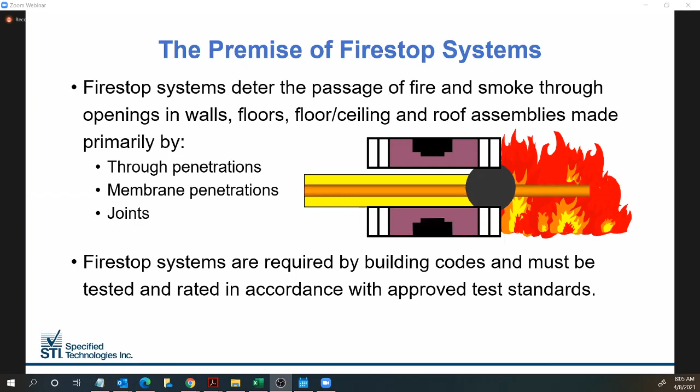Firestop systems deter the passage of fire, smoke, and hot gases through openings in walls, floors, and roofs for through penetrations, membrane penetrations, joints, blank openings, gaps, and other voids. These systems are required by building codes to be tested and rated as part of an assembly in accordance with their approved test standard.

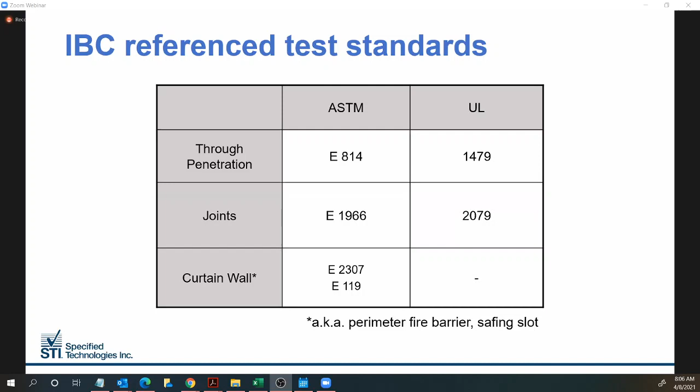The main test for penetrations is ASTM E814, with the expanded UL 1479 version giving the additional options of W and L ratings, those being water and air leakage ratings. For fire-resistive joints, ASTM E1966 provides fire and temperature resistance, whereas UL 2079 does the same and again provides the option for air leakage and water resistance. For curtain wall or perimeter fire containment, ASTM E2307 is the main test standard, but E119 is also allowed under a certain code exception. For that one, there is no UL version. If you're in Canada, then ULC S115 applies. And if you're joining us from outside of North America, you may be using British standards like BS 476 Part 20, European norms EN 1366 with various parts, or whatever your country or local jurisdiction has adopted. The basic principles of firestopping are the same around the world.

These are examples of common firestop applications, including pipe penetration, curtain wall joint — that's the gray colored sealant there — and head of wall joint. Firestop systems use a variety of specially formulated, independently tested fire-resistive products for sealing penetrations and joints in fire-rated construction against the spread of fire and smoke. The emphasis here is on systems, so firestop products are one component of a system. But firestopping certainly is an important part of fire containment and life safety.

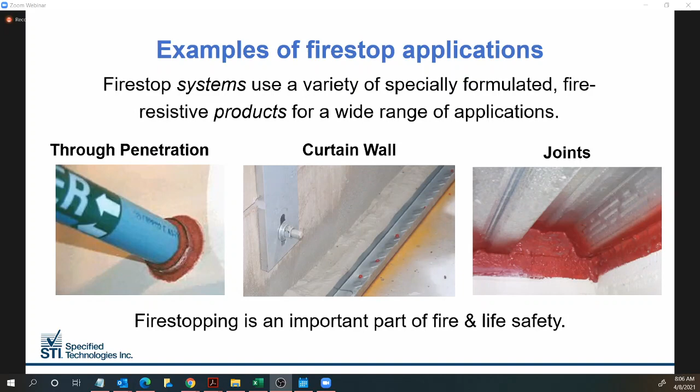So who tests fire stop systems? Fire stop system designs are tested and listed by independent testing agencies. In North America, UL, ULC, and Intertek are the most common, but FM Global also has listings, and Southwest Research Institute tests fire stop systems as well.

Most have their own listings published online. I'm sure you've seen some of those if you're into the fire stop business at all. And if you're in the UK or other countries using British standards, Warrington Fire is very well known,

and there are many other relevant testing agencies depending on your location. So what is a tested or listed system? It refers to a penetration or joint assembly which is rated per its corresponding test standard.

Shown here is the top portion of a simple pipe penetration system, and the written description is summarized on the left-hand side. All elements of the fire stop system, including the assembly into which it's installed, comprise a specific and inseparable unit that must be utilized as such. The specific elements of each design become integral to the listing.

In this example, UL system C-AJ-1240 describes all the elements of a metal pipe penetrating the concrete floor or wall. So in this one, it's a minimum 2.5 inches of concrete floor or wall or a CMU wall.

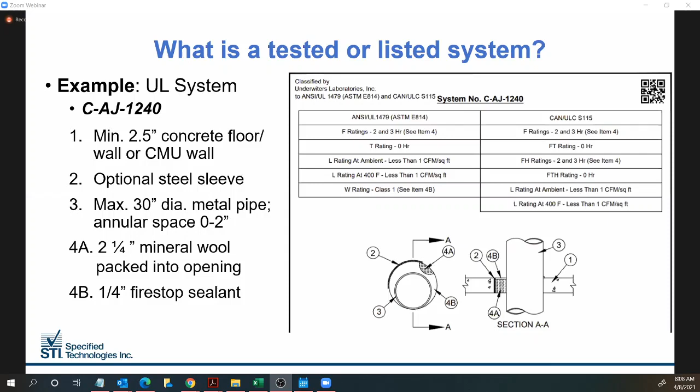So building codes require fire stop systems to be installed as tested or listed by qualified test labs. These two sections of the International Building Code are examples.

Through penetrations shall be protected by an approved penetration fire stop system installed as tested in accordance with ASTM E814 or UL 1479. And under joints, it states: installed in accordance with the manufacturer's installation instructions and the listing criteria. So simply put, install fire stop systems the way they were tested and listed. Just follow the instructions.

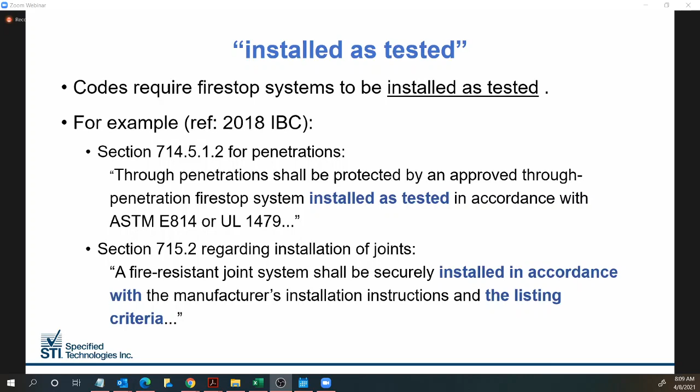But we can't test everything. There's no way to anticipate and test every condition that may occur during a construction project or the life of a building. Putting it nicely, unexpected things happen.

Construction is a complex process that requires an incredible amount of coordination and communication. It's not perfect. And we all know what happens during, let's say, renovation of old buildings. When walls and ceilings are opened up or removed, there's almost always surprises.

So in addition, new products and materials are introduced every year. New wall and floor assemblies are tested and listed. New construction methods are developed. Codes and standards change, et cetera, et cetera.

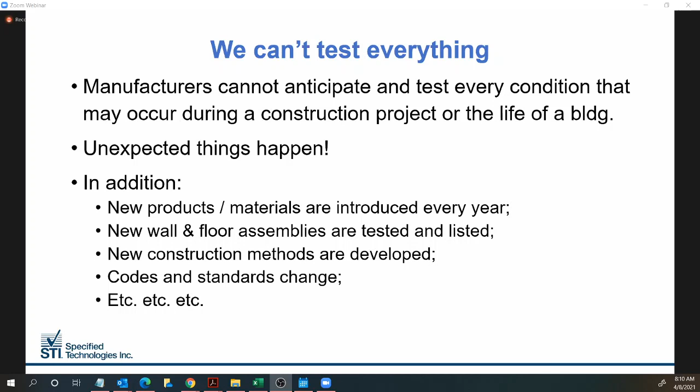So what happens when field conditions differ from tested systems? In this example, a hole was cored in one place, the wrong place, as it turns out. So a second hole had to be cored.

And now the opening looks like a figure 8, and it may no longer meet the parameters of the UL system that was chosen for this application, because the annular space, the distance between the conduit and the edge of the opening, may exceed the maximum allowed.

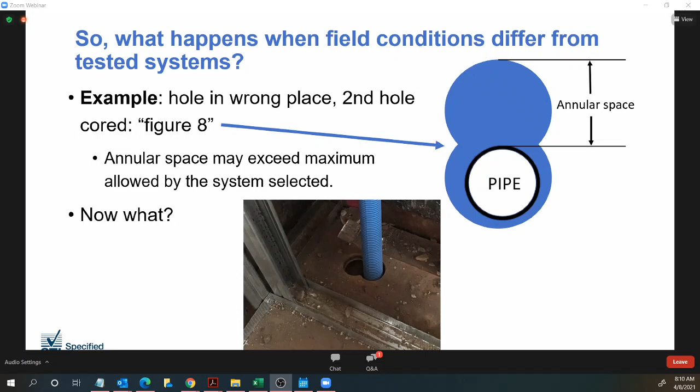So now what do you do? Well, first of all, try to find a tested system that does satisfy the field conditions.

You can look on UL's website called Product iQ, or Intertek's Directory of Building Products, manufacturers' websites, or contact a manufacturer. In the case of the figure 8 example, there are systems available for larger openings, but on almost every job site, situations will occur during construction for which there are no tested systems.

So step two, if no tested system exists for the condition, then either modify the condition or request an engineering judgment. When I say modify the condition, I mean something construction related. For example, reduce the size of the opening, or extend a wall up to a hard ceiling, maybe move a penetrant, or a myriad of other things.

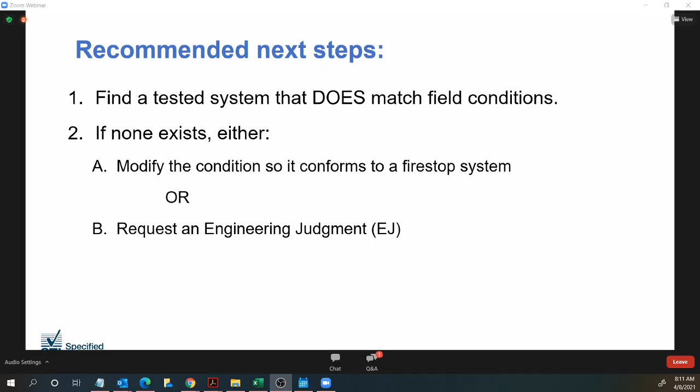But if modifications are not possible or practical, then an engineering judgment can be requested.

There are several different definitions of engineering judgment out there. This one is UL's definition, which can be found on their website. And their definition is broader than just fire stop systems. It addresses any fire-resistant design, assembly, or system.

So you're looking at the yellow highlighted part here. An engineering judgment is a method or process used to resolve field needs when a tested design, system, or assembly is not available. It goes on to say that it should be done by somebody knowledgeable. It should be acceptable to the code authority and be site-specific.

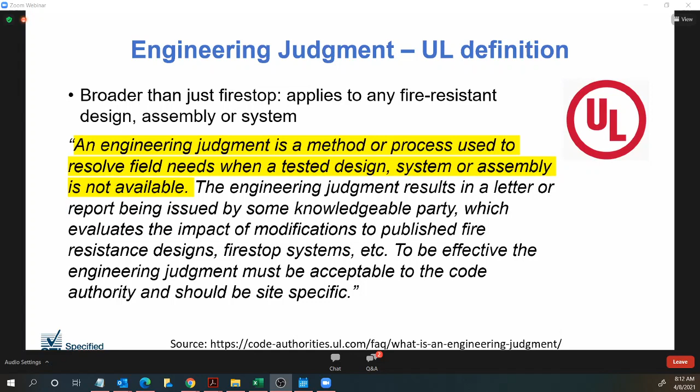The International Firestop Council, or IFC, also has a definition, which you'll see on the next slide. In fact, IFC has a multi-page guideline for engineering judgments. But first, if you're not familiar with this organization, it's a not-for-profit association of manufacturers, inspectors, and users of fire protective materials and systems, and it's an excellent source of Firestop information.

The IFC has a document available on their website called Recommended IFC Guidelines for Evaluating Firestop System Engineering Judgments. Within these guidelines is a definition of engineering judgment. To paraphrase, it says, when field conditions differ from original design, propose alternative methods, sometimes referred to as engineering judgments, or EJs. There are other terms, like in Western Canada, EJs are also known as TJs, or technical judgments. We'll get to that.

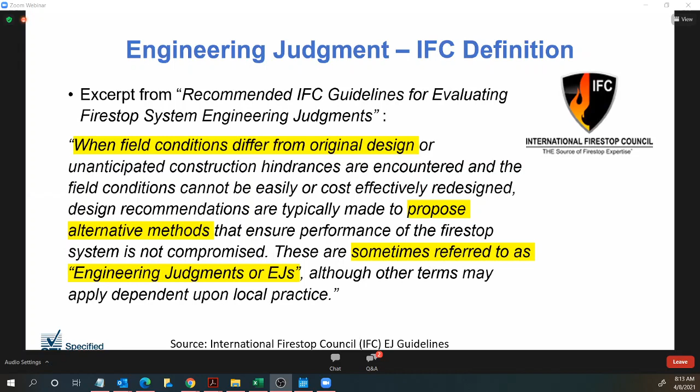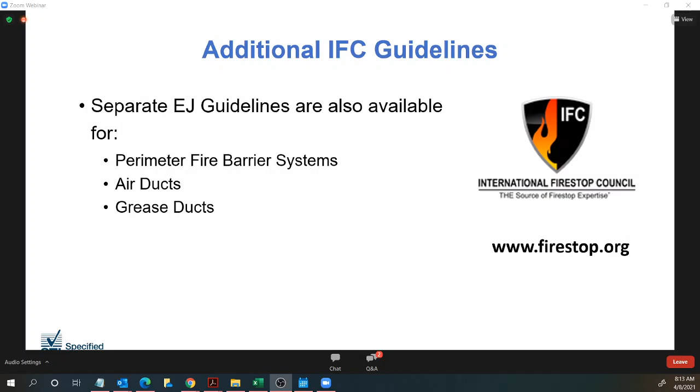IFC also has EJ guidelines specifically for perimeter fire barrier or curtain wall systems, air ducts, and grease ducts. However, for the purpose of this webinar, we're going to focus on the guidelines for Firestop systems, which include penetrations, joints, and perimeter fire barrier.

I like to think of engineering judgment as just a fancy term for alternative design. So it's really quite simple in concept, but it's important to understand how they're done and by whom, as well as the regulations that affect them, because they're an important part of fire stopping, life safety, and liability.

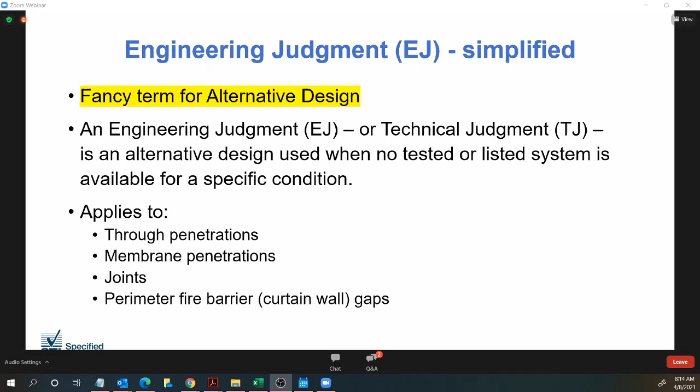Now let's talk about building codes for a moment. Although codes require Firestop systems to be tested per approved standards, alternative designs are allowed. Codes are not designed to restrict the use of any material or design or method, but alternatives must be approved by the building official. Generally, alternatives are discouraged in favor of tested systems, but there are situations where they can't be avoided.

Take CLT construction, for example. CLT stands for cross-laminated timber, also known as heavy timber. CLT construction is allowed by the International Building Code for high-rise buildings. However, there are no tested or listed Firestop systems available yet. Fire tests are in progress by STI and others, but it's very challenging compared to using concrete, masonry, and drywall. The UL is busy developing a category for this.

But any fire stop systems used in CLT construction have to use EJs or alternative designs because there's no choice. Now, if you look at IBC section number 104.11, it basically states that alternatives shall be approved where the building official finds that the proposed design is satisfactory and complies with the intent of the code, and that the material, method, or work offered is not less than the equivalent of that prescribed in the code.

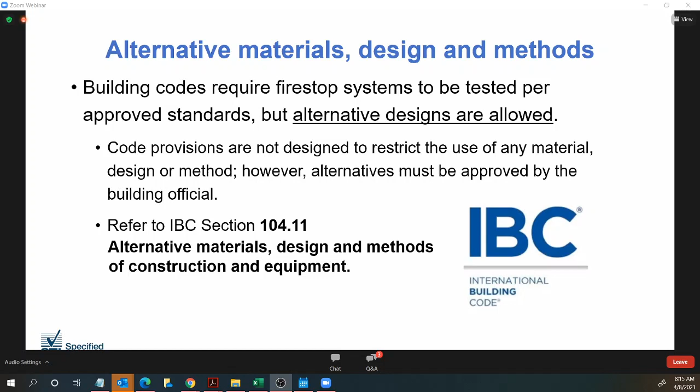In Canada, alternative solutions are also allowed by code, the National Building Code, or NBC. Western Canada tends to lead in code enforcement. If you're in Alberta, like Calgary, Edmonton, and so on, then you're familiar with StanData. StanData is a separate organization which publishes informational bulletins, guidelines, and reports. And in this case, there is one for Firestop engineering judgments. The BCB number 19 BCB 005 provides guidance for engineering judgment for Firestop systems as an acceptable solution under the National Building Code. That's where the term technical judgment came from, or TJ.

Now, if you deal with the British or European or other codes, you'll find that alternative systems are allowed there as well. It's just good practice to use tested systems whenever possible, but allow alternative designs when necessary under certain guidelines and approval by the authority having jurisdiction.

So who issues EJs? Firestop manufacturers typically issue engineering judgments upon request, and there's no charge for this. As far as I know, nobody charges. It's part of the business. However, only qualified technical personnel should issue them. EJs may also be issued by fire protection engineers, knowledgeable registered professional engineers, independent test agencies that provide listing services for Firestop systems like UL or ULC.

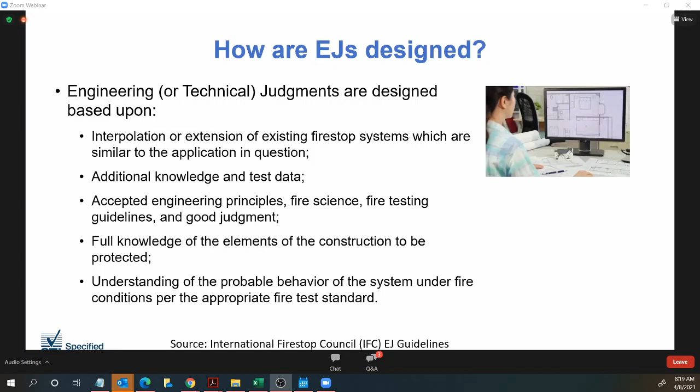What do engineering judgments look like? When you get one, it's going to look very similar to a tested system, but it should be clearly identified as an engineering judgment. They're normally presented as one or more illustrations with a detailed description, just like a Firestop system. But illustrations are not required. Some may be in written form only. There's no rule that says you have to have a drawing.

An EJ should also include clear directions for the installation of the system, include the date of issue, an authorized signature, an issuer's name, cite the tested systems upon which the EJ was based and have proper justification, identify the project name and location as well as the company to which it was issued, and provide complete descriptions of all the critical elements for the Firestop configuration.

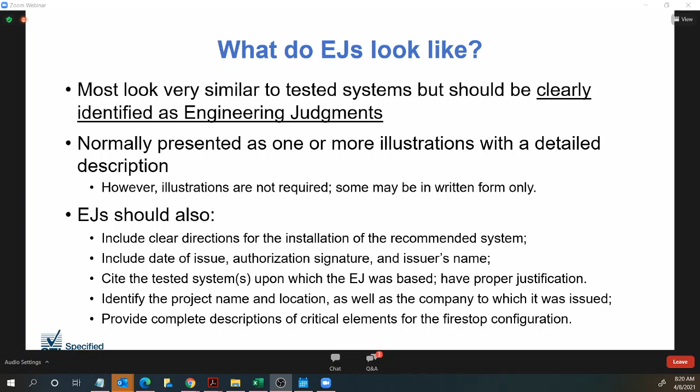So this is an example EJ that was done for a large opening with multiple insulated pipes, and this is a 2-hour shaft wall. There are tested systems for insulated pipes through shaft wall, but they're limited. In addition, these were steam pipes, and the insulation was up to 4-inch thick glass fiber.

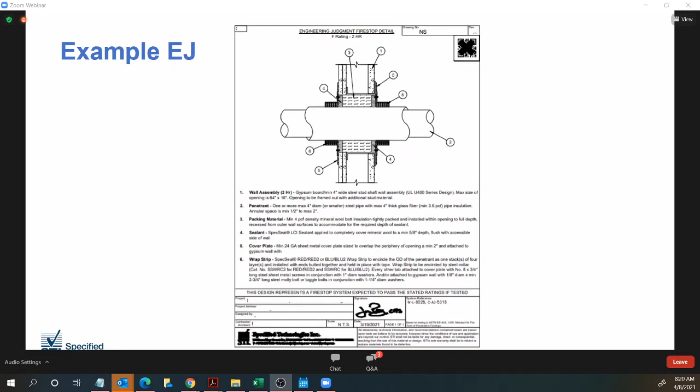At the top, you can see a drawing, the fire rating, 2 hours in this case, and the EJ number, which has been hidden. The main reason for the EJ in this case was the type and thickness of the insulation. Glass fiber insulation breaks down in fire, and if it's not fire stopped properly, will allow fire to spread through the wall. So fire stop collars were required around each pipe in this case, which expand during fire and close the gaps left by the consumed pipe insulation.

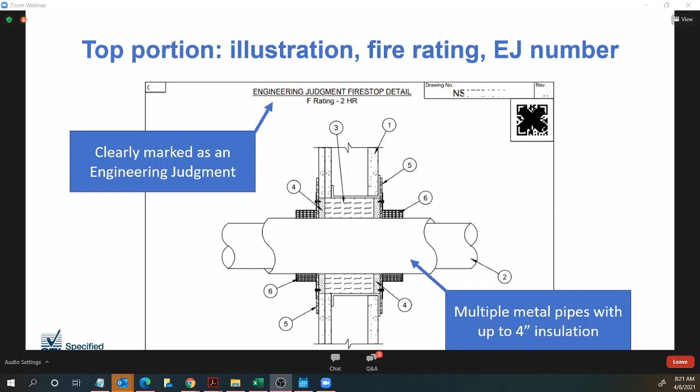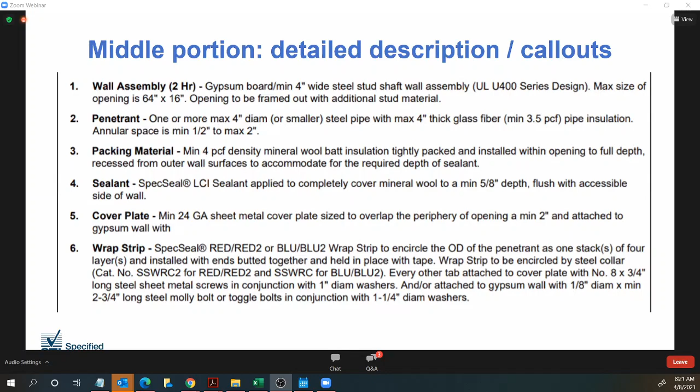The middle portion of the EJ has all the details. This is the written description. It's got the wall assembly, the penetrant, the packing material, sealant, steel cover plate in this case, and wrap strip with steel collars. All the details are here.

And in the lower section, it's an information block. We've got the information including project name and location, the EJ designer, the responsible party, that's usually the contractor or architect, a signature, date, and the reference systems.

If you ever wondered which applications result in the most EJs, here's your answer. This chart shows the most common types of EJ requests done by STI in 2020. Other full-line suppliers of Firestop may have a similar distribution. Of the thousands and thousands of EJs issued last year, about 59% were penetrations, 28% joints, and 13% curtain wall.

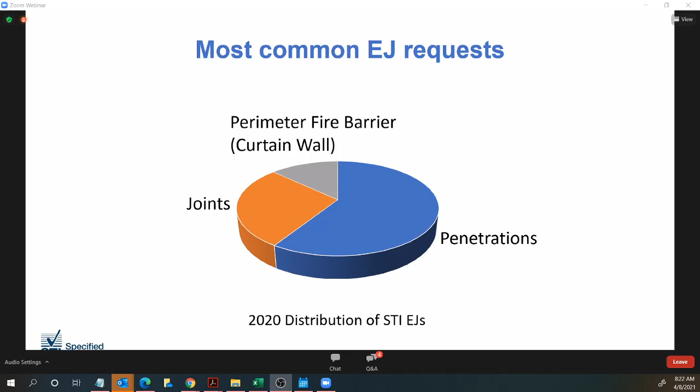But if you ask our engineering services team about EJs, they'll tell you that joints and curtain wall systems take the most time. They tend to be the most complex and difficult situations to deal with.

So how do you submit a request for an EJ? Well, most manufacturers have a standard form, usually online. However, each company is different, so just ask what their process is. A standard form acts like a checklist to help you collect all the required information.

In a minute, I'll show you what's required for each type of application. But any additional information you can provide, such as plans, photos, sketches, or notes, helps technical personnel a great deal in understanding a situation and providing accurate EJs that reflect real field conditions.

So what information is required to request an EJ? First of all, EJ requests must have the name and address of the project, because every EJ is project specific. It cannot be reused for a different project without submitting it first for review with respect to the project in question. So all EJs should also note the responsible party, like architect, engineer, contractor, or building owner in the case of maintenance work or remodeling.

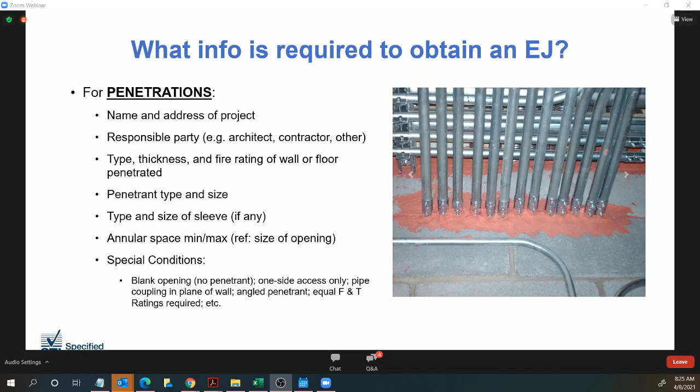We need to know the type, thickness, and fire rating of both intersecting walls or floors. You need to know the joint width. And again, special conditions—is there movement involved? Did the structural engineer say you need plus or minus half an inch movement, for example?

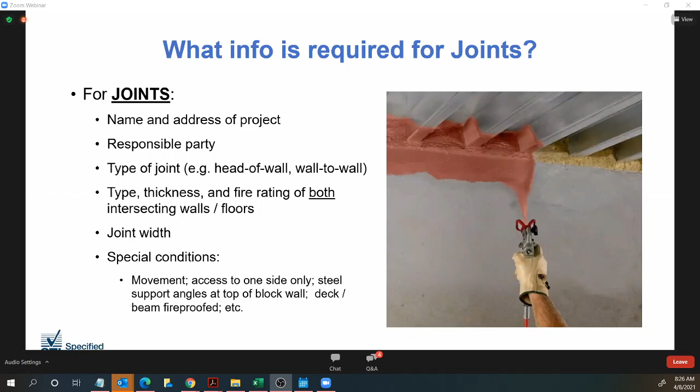Again, access to one side only. Then maybe there's steel support angles at the top of the block wall for structural support. Maybe there's a deck or the beam going through that's fireproofed. And all these things should be noted.

And for perimeter fire barrier EJs, we start with the exterior wall type. Is it aluminum frame with glass? Is it steel stud, precast, GFRC, or other? We still need the floor type, thickness, and fire rating, just like the others.

Joint width, which is the distance from the edge of the slab to the framing, which of course you have 0 if the framing is sitting directly on the concrete. The windowsill height is important.

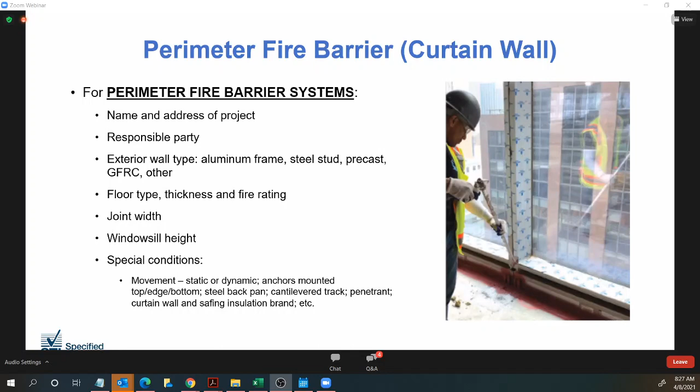And when it comes to special conditions for curtain wall, movement may be a factor, static or dynamic. Where the anchors are mounted is important—top, edge, or bottom. Maybe it has a steel backpan, could be a cantilevered track. Maybe there's a penetrant coming through the joint for lighting or shades. Or maybe there's a specific brand of curtain wall insulation or safing.

So how long does it take to get an EJ? If you're doing it for the first time, you may have some expectation in your head, but it depends on many factors. The thing is, when you're in the middle of a construction project, EJs can cause delays if they're not handled efficiently. So STI sets the bar in the industry with a typical turnaround time of 24 hours or less.

In fact, many are turned around in just 4 hours, or half a business day. However, some times of the year are busier than others. For example, March and April tend to have the highest demand for EJs.

But number one, definitely provide clear and complete information. That is the biggest delay in getting an EJ back. The complexity of the application has a bearing on the time, as does the efficiency of the manufacturer's process or technical personnel, and the volume of EJs at the time of request. Okay, they're high right now, but we're still cranking them out in 24 hours for the most part.

Number of changes or corrections required, if any. Sometimes you'll get an EJ back and you look at it and there's something missing. Maybe you forgot to tell them something, or maybe they overlooked a small point.

Going a little bit back and forth does happen sometimes, and there are other factors. But when you make a request, try to put yourself in the shoes of the person who will be designing it. They don't have the advantage of being on site, so they rely entirely on whatever information is provided. The use of details, photos, notes, and hand sketches are very helpful in understanding the field conditions, and it's critical in order to get an EJ that meets your needs and satisfies the building official.

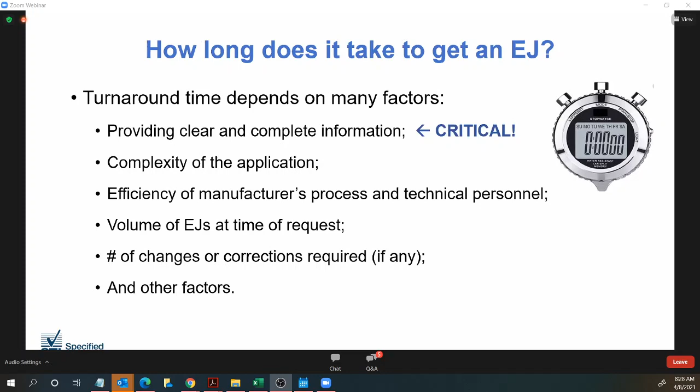Now, this question I get typically from someone who ran into this requirement for the first time: do EJs need to be stamped by an engineer? Well, it depends entirely on the jurisdiction. Generally, the answer is no. But the ones you see listed here, we know have done this, and there are others. This is by no means an exhaustive list.

So if you're in the New York City area, only select high-profile projects and certain applications, maybe curtain wall, have been known to have the requirement of getting an engineering judgment stamped. The Port Authority of New York and New Jersey is the same, sometimes for a complex application, but it's the exception, not the rule. If you're in Florida, in Miami-Dade County, very often you'll need to get an EJ stamped. In Orlando, Orange County, Florida, about a quarter to half the time, you're going to need a stamp as well.

Walt Disney World: all EJs need to be stamped. They have strict standards, mouse rules, as they say. In Clark County, Nevada, Las Vegas, if you're working on the Strip, where all the big hotels and casinos are, all EJs need to be stamped. If you're in the suburbs like Henderson or somewhere, not necessarily — that depends on the inspector.

If you're in California, OSHPD, who is California's healthcare overseer, and the California State Fire Marshal very often require engineering judgments to be stamped. If you're in the Chicago area or somewhere in Illinois, the Illinois Department of Health requires at least commentary by an approved fire protection engineer on every engineering judgment. Mecklenburg County, North Carolina, that's Charlotte — all EJs have to be stamped and use a specific form. And if you're in Canada, the Greater Toronto area, my colleagues up there say around half the jurisdictions are now requiring it. And in Western Canada, like Alberta and BC, it's very much a growing trend in the larger cities.

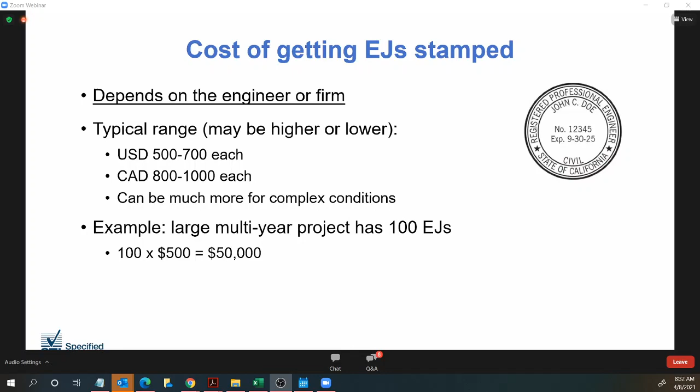There are some authorities having jurisdiction who do not allow engineering judgments for new construction, period, at least during the design and permitting phase. Now, contrary to what you might think, most building officials are pretty reasonable, and I'm sure we all have stories of someone who wasn't, but most are agreeable to reasonable solutions when problems occur during construction. But for new construction, one reason some jurisdictions stopped accepting EJs is that too many plans were being submitted for new buildings with dozens of EJs before construction even started.

Now, this goes well beyond Firestop. It's not a Firestop issue, it's an EJ issue. But they grew tired of that, and who can blame them? Their job is to enforce the code, and in many cases, the code was being ignored and substituted with less expensive alternatives. So from that point of view, it's easy to understand a building official's position.

EJs are meant for situations where there is no tested assembly, and theoretically, that should only occur during construction, where all kinds of unexpected things happen. But nothing's that black and white, and every project and jurisdiction is different.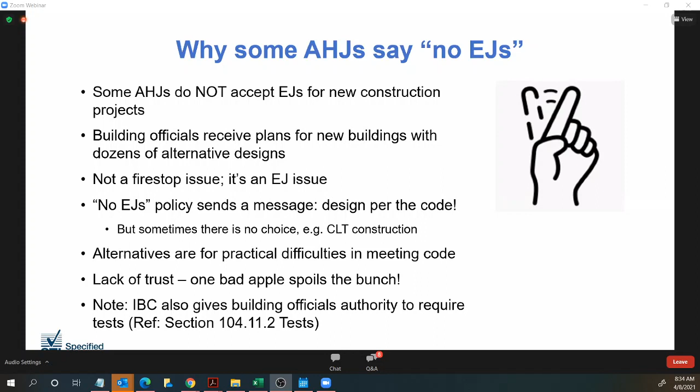All right, now let's look at some real life examples.

First of all, this is a head-of-wall joint. This was a recent application at an existing prison where the authority having jurisdiction was very strict on code enforcement. The wall was a shaft wall, so there was only access from one side, and the joint was concealed by a continuous steel angle at the top, also fireproofing. You'll see that angle in the next slide. So you might look at this and think that's enough for a 2-hour rating, but there's no tested system for it, and the area above the wall was concealed.

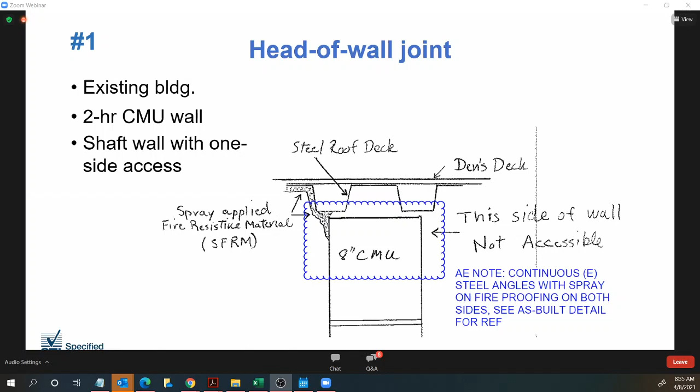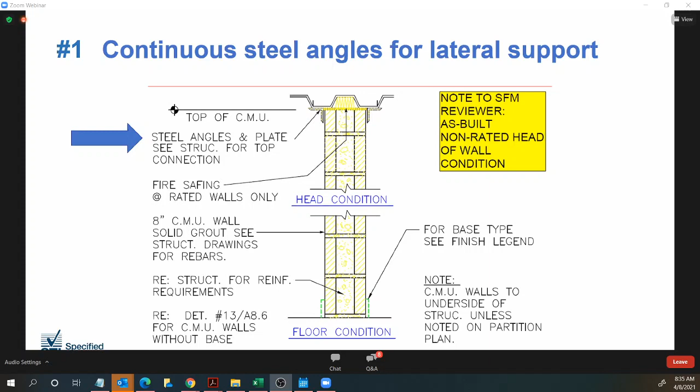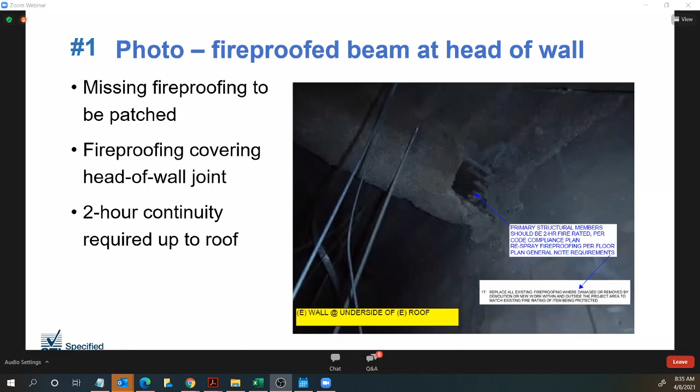The solution in this case, which was a collaborative effort with the architect and the contractor involved, was a gypsum shaft wall construction with fire stopping where it met the wall and the underside of the roof.

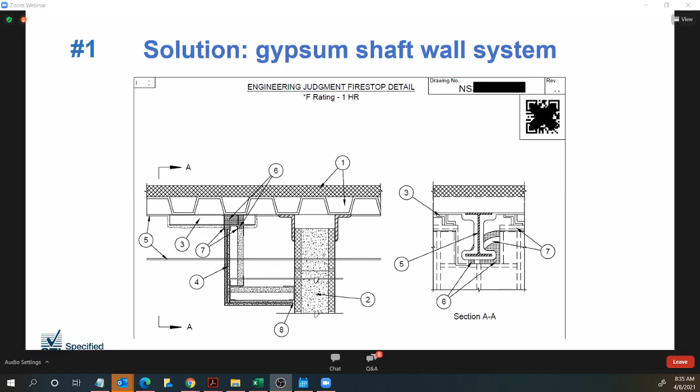Here it is in more detail. First of all, at the bottom there was a simple fix: just a fire stop sealant between the horizontal gypsum boards and the block wall. At the top is a little more complicated.

We call it a sandwich type system. Had to install this from one side, and we also refer to it as stuff spray, stuff spray. There's mineral wool backing and fire stop spray above the shaft liner board, and then again above the double 5/8 type X gypsum. So you stuff it with mineral wool, you spray it, you stuff it with mineral wool, and you spray it.

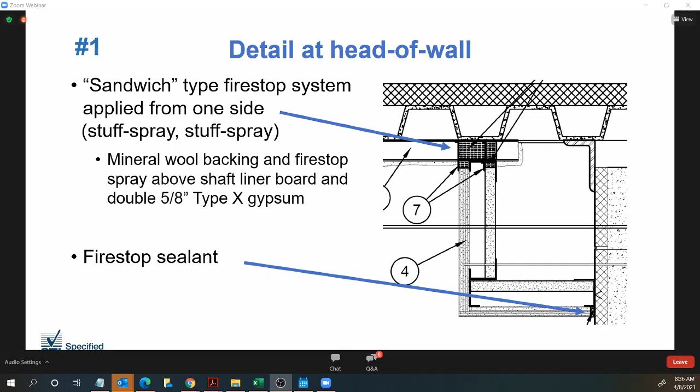This system took some back and forth to get all the details correct and satisfy the fire marshal, and also be confident that it could be constructed correctly.

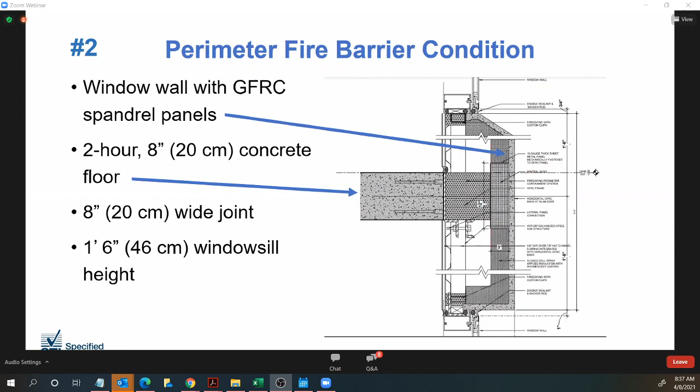This looks pretty good overall, but there were 2 issues. One, there's a metal panel fastened to the GFRC panel. It's filled with mineral wool, but that's not part of any tested system. And two, although there's fire safing in the joint between the edge of slab and metal panel, the density and compression were not called out, and there's no fire stop sealant for smoke as well as fire and hose stream resistance.

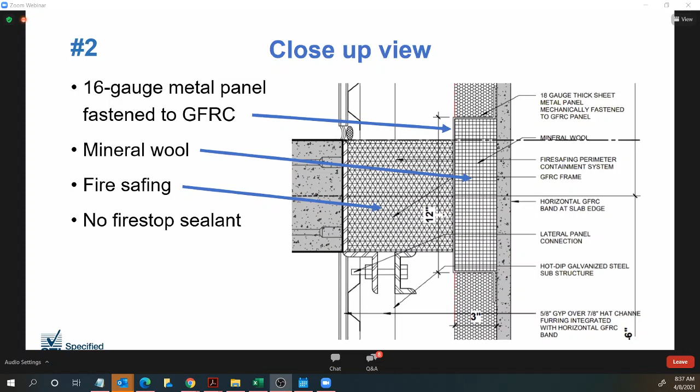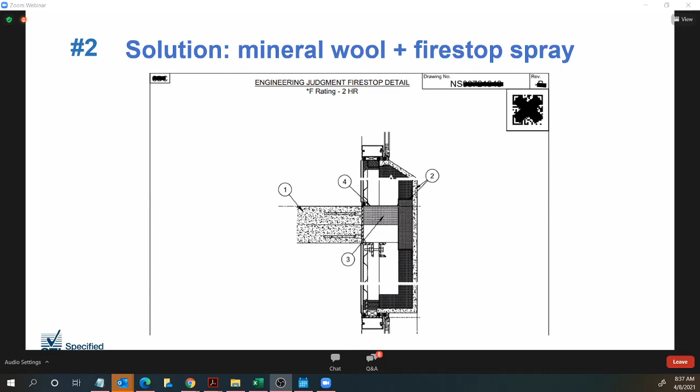So the solution in this case was essentially to add fire stop spray over the fire safing. The next slide shows it in more detail: a minimum of 4 inches of mineral wool was compressed in the joint, compressed 33%, between the edge of slab and the metal panel, and then sealed on top with a specific fire stop spray.

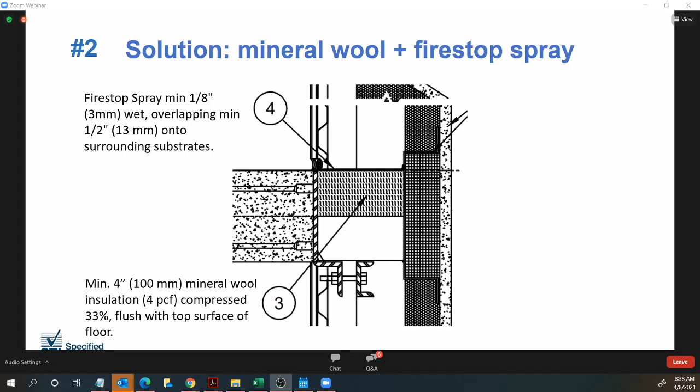Example number 3. In this situation, there's a 2-inch diameter steel conduit penetrating one side of an existing wall made of lath and plaster.

The wall consisted of 7/8 inch plaster on metal lath on both sides, for a total thickness of 5 inches. The building was an older hospital built in the 1950s, just before drywall started replacing lath and plaster as a quicker, easier installation option. And since modern day fire testing didn't really take off until the late 80s, there aren't any fire stop systems using plaster walls.

However, that doesn't mean plaster doesn't have any fire resistance, because it does. In fact, the IBC has a table of fire resistance of various walls and partitions, including plaster. If you're interested in learning more about that, refer to IBC sections 719, 720, and 721. The person who submitted this request cited that code, which supported a 1-hour fire rating for this type of wall construction. And based on our experience and similar tests with drywall, we were able to provide an engineering judgment.

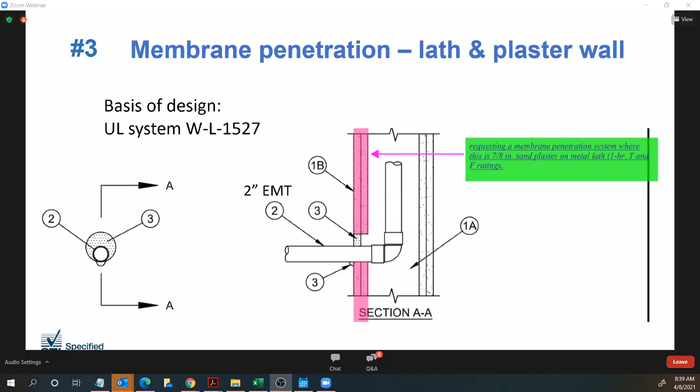So this one turned out to be a very simple solution, using fire stop sealant around the conduit.

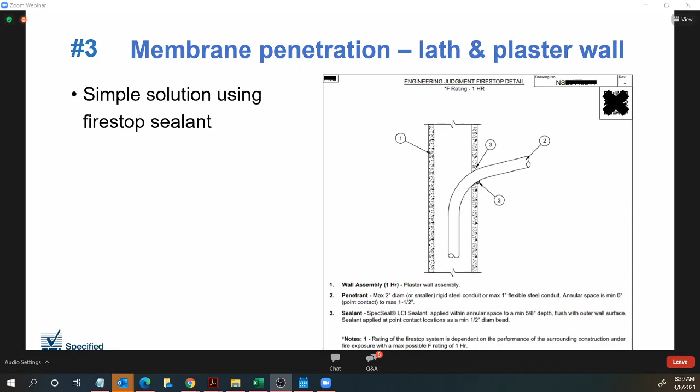Okay, in this last example, this was again a perimeter fire barrier, a curtain wall. This building had some curtain wall conditions that did not conform to any tested system, due to the angled walls and some corner designs. Code enforcement was very strict. In fact, the building official was not accepting any EJs.

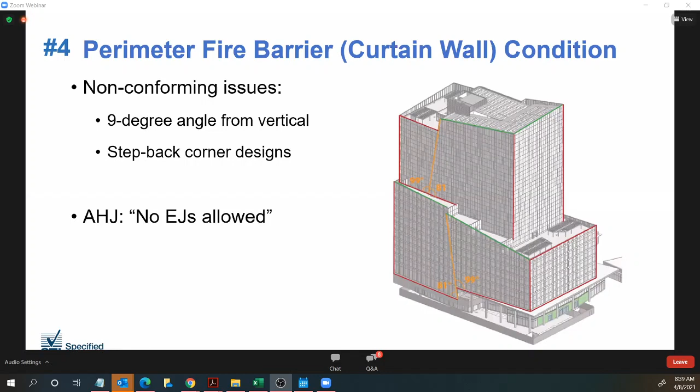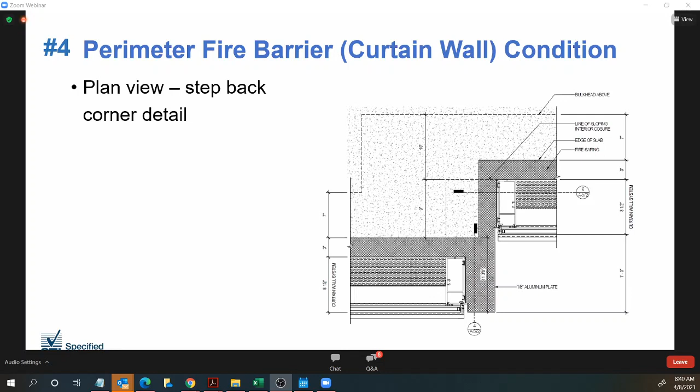And here's a plan view of a step back corner, as it was called. So you're looking down on a typical floor here. The darker shaded part is the joint between the floor and the curtain wall. There were also two different types of glazing systems planned for this project.

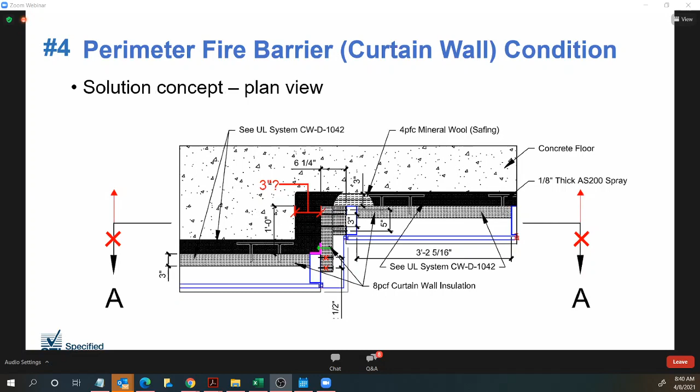We felt the condition was reasonably similar to other tests that have been done. So as a group, the general contractor, architect, curtain wall manufacturer, and STI proposed an EJ and made our case to the building official to avoid having to do a test, but to no avail. So there was no choice in the end but to do an actual fire test, because the project was too far along to change the design of the curtain wall.

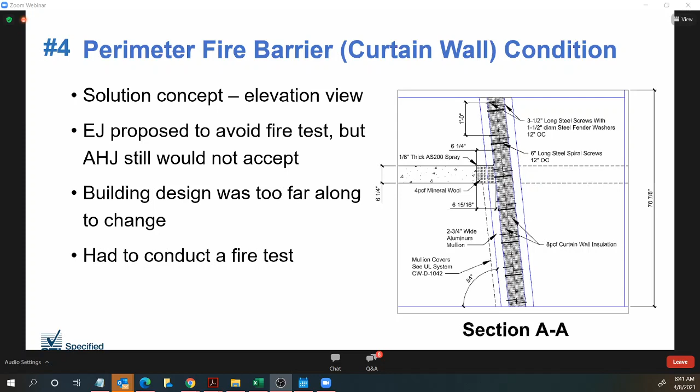So we designed a test and moved forward. This was the curtain wall construction detail, and you can see the step back corner at the top, and then the angled wall. So testing a curtain wall system is a long, expensive process to complete.

So this part of the project was delayed for months while the test was being done. You can see all the different steps involved in doing such a test. You have to start out with some agreements between parties. There's concept and design. We had to get the approval of the authority having jurisdiction, because we didn't want to do the test and then have them say no. You've got to plan and order the materials, install the system, wait for it to cure, witness the test, write the reports, and then publish the system.

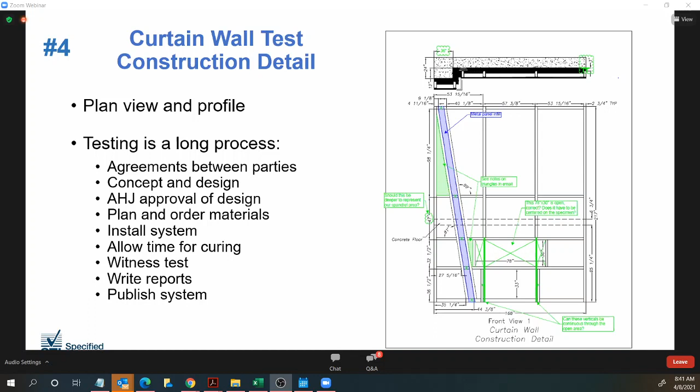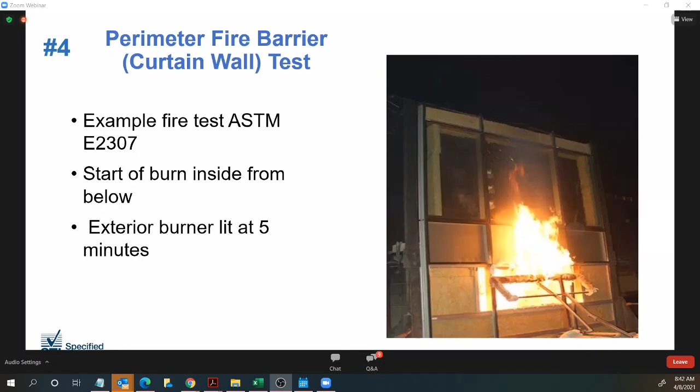If you've never seen a curtain wall test, this is what it looks like. It's a two-story apparatus with two burners. The interior burner is lit first, followed by the outside burner after 5 minutes. Now, in this case, the goal was a 2-hour rating, but we let it go much longer for additional data and observation, and this turned out to be a very successful test.

In the end, a new UL listing was published, as you can see here. It might not be ever used again, but if the same or similar conditions appear on a future project, it'll be a very good reference.

Please understand that this was a very rare case in which a test had to be done. We most certainly can't test every situation that comes up. The cost and the time required are prohibitive. Nothing would ever get built.

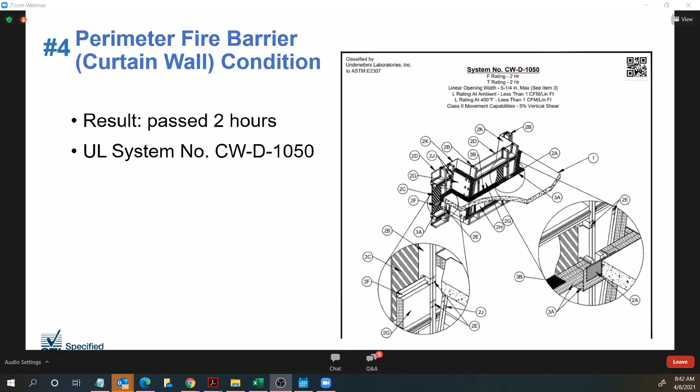One last point, then I'll turn it over to John.

Currently, there's no oversight of engineering judgments. Each manufacturer is responsible for its own process, and that won't change. However, UL, together with manufacturers and others, is in the process of creating a new program that would audit those who issue engineering judgments, or technical evaluations, as UL is going to call them. The goal of the program, as I understand it, is to create more validity and acceptance of EJs throughout the industry. If a manufacturer chooses to participate, a management system would be developed by the manufacturer, if one doesn't already exist, and periodically audited by UL for conformance.

In addition, UL will randomly select EJs for fire testing to prove their validity. The people who issue EJs will be required to have a certain level of education and experience and pass a written exam. They will also have to be recertified every 3 years. In return, that company can promote the fact that their EJ process is UL certified, or whatever the actual terminology will be.

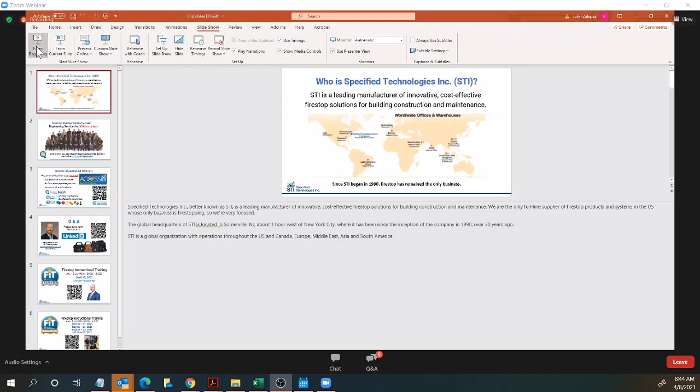All right, Keith, great job there. Do we see the map up there?

So just want to let everybody know, Specified Technologies, or better known as STI Firestop, we are a leading manufacturer of innovative, cost-effective fire stop solutions for the building, construction, and maintenance. We're the only full-line supplier of fire stop products and systems in the United States whose business is fire stopping, so we're very focused. Our global headquarters is in Somerville, New Jersey.